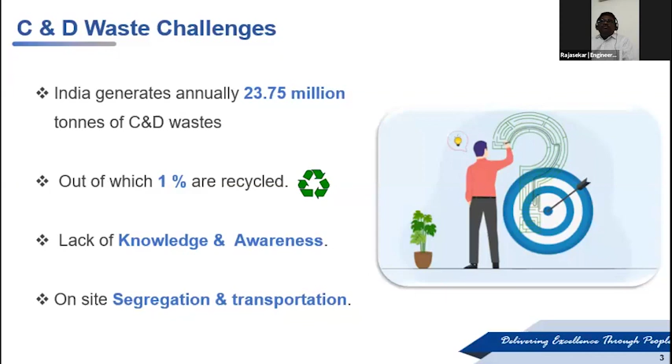Fourth, in our cities like Mumbai, Delhi or Chennai, there is already a lack of space, so we can't segregate it on site as wooden scrap, brick debris, or concrete debris. There is a segregation problem and a transportation problem - local bodies have not identified where we have to deposit or dispose of this scrap. These are the 4 challenges which I thought we have to address first.

These are the facts of construction demolition waste. Regarding this, the Government of India gave clear guidelines in 2016, which came in the form of an act under the Pollution Control Board, under the Ministry of Environment, Forest and Climate Change. This act should be executed as a sub-act of the Municipal Solid Waste Management, to be executed by urban local bodies - meaning corporations, municipalities, panchayats - who have to take the lead on these issues. This is the legal aspect.

Coming to the technical aspect, IS 383, the specification code for aggregates, has given a provision that we can use recycled aggregate in our concrete as a replacement for natural aggregates. Recycled aggregates are called RA, or recycled concrete aggregates. In our government projects too, it has been made mandatory to use at least 10 to 20% in municipal and government contracts. That means we have a legal provision also.

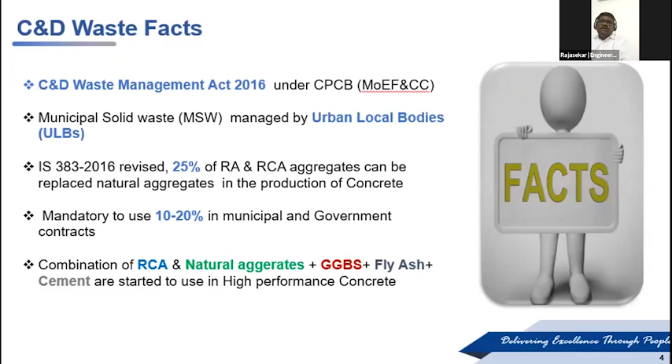Next, we are having technical provisions. Our researchers are working on how to use more than 25%, how we can replace natural aggregate, whether we can increase from 25% to 40% by using GGBS and fly ash along with increased cement content. This can also be used in high performance concrete, meaning concrete of grade more than M30, M40, M50.

This is the annual requirement of raw material for the Indian construction industry, taken from our Union Budget 2022-23. We need around 380 million metric tons of cement, 50 million metric tons of steel, 600 billion numbers of bricks, 400 million cubic meters of natural aggregate, and 40 million cubic meters of timber. That means for cement, steel, bricks, and natural aggregates, we have to once again depend upon natural resources.

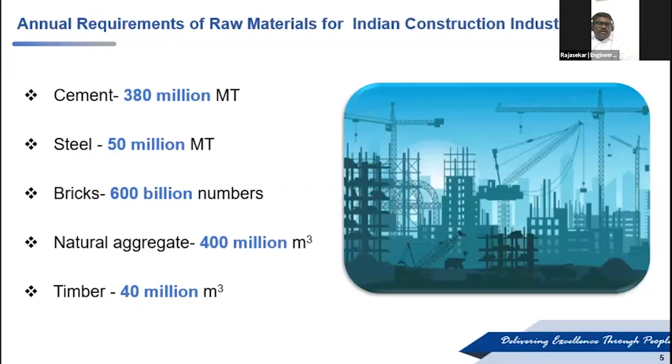On one hand we have to save natural resources, on the other hand we are just wasting this demolition construction waste. Once we start recycling, we can replace this huge quantity to some extent. For example, for natural aggregate around 400 million cubic meters, we depend on rocks and river beds. Once we increase replacement by 30%, we can reduce from 400 million metric tons to 300 million metric tons of natural resources, so we can save the mountains and river beds.

This is the construction waste generation contributed by the top 7 cities of India. Ahmedabad and Kolkata contribute around 700 to 800, Hyderabad and Chennai contribute around 2000 to 2500, Bangalore and Delhi contribute around 3000 to 3700, and Mumbai contributes more. The reason is Mumbai is always a developing city, and we can't stop this development. Mumbai here means Mumbai, Navi Mumbai, and Kalyan - all 3 corporations are included. So Mumbai contributes more compared to other cities. This figure is taken from the State Pollution Control Board of the respective states.

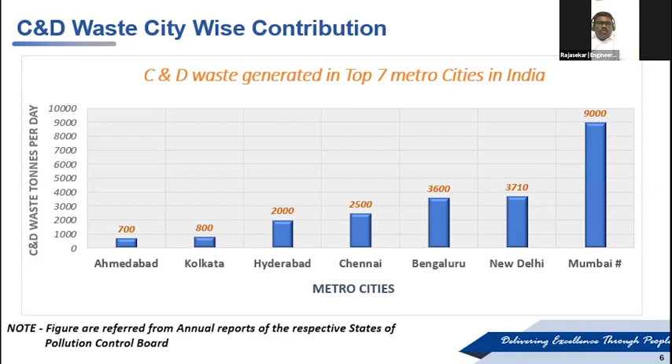This is the adverse effect of construction waste. Usually what we do is deposit this waste, generated at our own site, in unauthorized areas - mainly river beds along the rivers or along roadsides. Because of this, river bodies get affected, and stormwater drains get choked during monsoon time, disturbing traffic also.

Second, this has a great effect on the environment, changing the chemical properties of the top soil, so vegetation also gets affected. Third, groundwater also gets affected due to these unauthorized deposits. Fourth is the diminishing of landfill area, where we want to actually use this landfill area, but we are not able to use it as supposed.

Fourth, when we go for demolition, or construction, or removal of any debris, there is definitely severe air pollution taking place. In this photo we can also see this - I have taken this from the guidelines given by the Government of India. The first page of this photo speaks a lot.

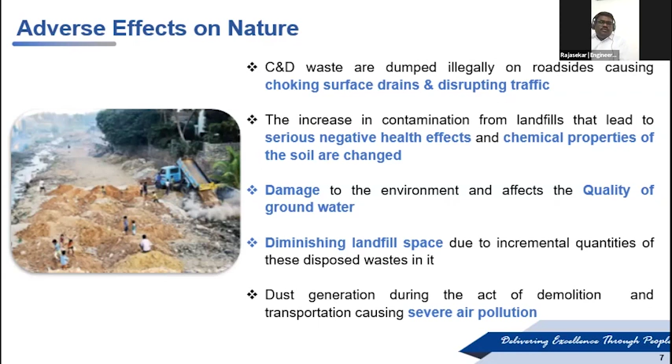In order to control this waste, the 3R system is effective - reduce, reuse, and recycle. First, collection of construction and demolition waste is very important at the site level itself. Site people have to get more awareness on how to segregate brickbats, concrete debris, wooden scraps, steel scraps, and cable scraps. Once they start to segregate at the site level itself, we can complete around 50% of our challenge and go ahead.

Second is transportation. Before collecting, we have to decide where we have to transport this - whether we have to go to a scrap yard, a landfill, or a recycling plant. That has to be finalized.

Once the waste is reached to the recycling plant, the process will get started. The recycling, once it got recycled, is recycled into two manners: either in a silt form or an aggregate form. That application we will see in the next slide.

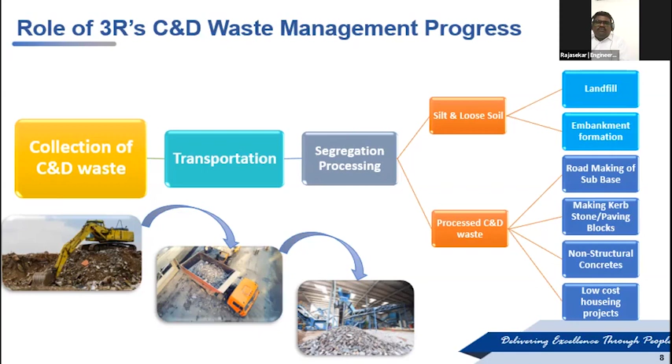As far as C&D waste plants in India, totally we are having 16 C&D waste plants. I came to know through the ministry that around India is going to set up around 100 to 150. The Ministry of Urban Development is going to set up 150 C&D waste management plants across the country, out of which around 20 will come in Maharashtra, and the balance will be distributed equally to all other states.

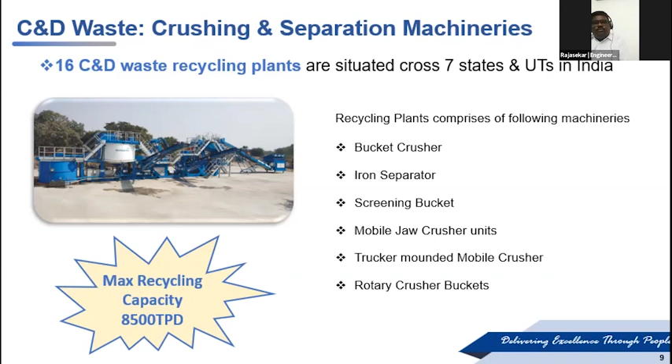These are the machineries which we generally use: the bucket, crusher, iron separator, screening, or mobile crusher unit. This mobile crusher unit can also be used in small sites, wherever demolition, renovation, or expansion of a building is taking place with extensive repair works. These small mobile plants can be installed there itself so that we can reuse the material then and there.

Once it gets recycled, it is called recycled aggregate or recycled concrete aggregate. It may not be equal to natural aggregate, but around 70 to 80%, it can meet the technical parameters. As per IS 383, there is a separate provision given for recycled aggregate.

Recycled aggregate means the aggregate which has been recycled from bricks, masonry, or WBM. Concrete recycled aggregates are the aggregates which have been obtained from the demolition of RCC structures, pile heads, the leftover of RMC plants, or the demolition of old roads. When we are recycling those particular structures, they are called recycled concrete aggregates.

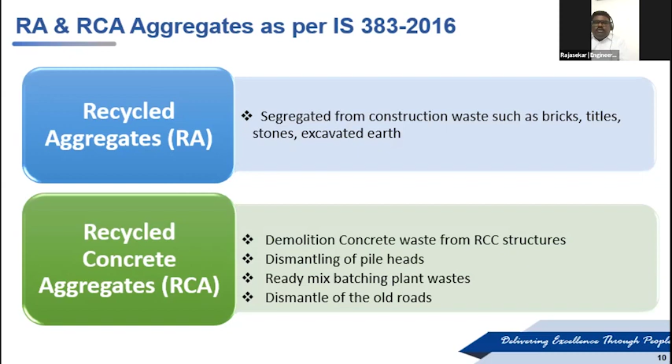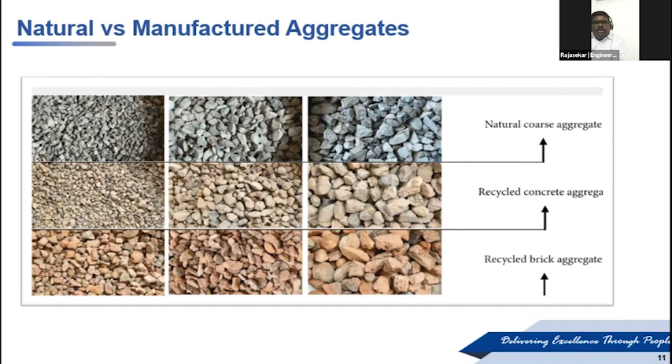These concrete recycled aggregates can be used up to M30 grade concrete as per the current provisions. We can replace around 30 to 40% of the natural aggregates, meaning in non-structural members of housing sectors.

Also in WMM and WBM of roads. In roadworks we can extensively use it, no issue, apart from bridges - we can use it in ordinary roadwork. In drainage, gutters, walls, or curbstones we can use it. CPWD has also started giving good provisions allowing its use. And for pedestrian paths, walkways and such, we can use it.

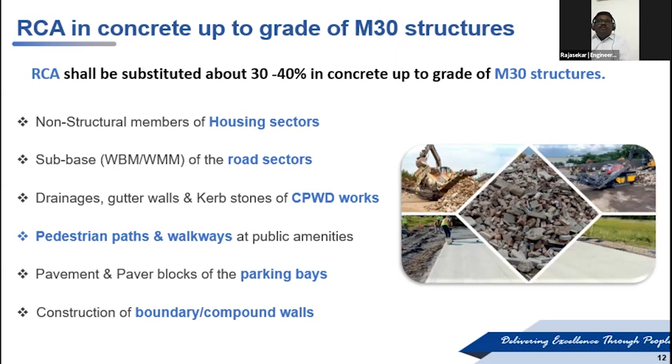Also for pavements, paver blocks, parking bays, and construction of boundary walls. Boundary walls are basically non-structural members that just demark boundaries, so we can extensively use it there.

Where we can use 100% means wherever filling is going to take place, or for PCC - plain cement concrete below the foundation, dry lean concrete - we can use it 100%. Before, we saw replacement of 30 to 40% or 25 to 30%; here we can replace around 100% itself.

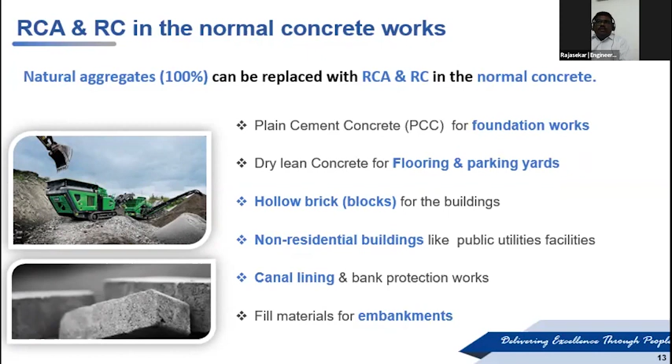For non-residential buildings like public amenities or park areas, we can use it, or for canal lining we can use it extensively. For irrigation works, for lining purposes, we can use it without any doubt. And for filling of embankment works - in embankment works or bridges where the road approach is there, we can also use it.

These are the utilities of recycled concrete and recycled aggregate. Coming to the conclusion and discussion, right now we need a robust method of collecting construction waste management - that is, we are having the rules, we are having a system.

That system has to be performed. Once it gets performed, we'll be able to see a visible output. We need a robust method so that we can handle this C&D waste.

Then installation of a recycling plant. Each and every person involved in construction should know where the debris should go, where it should reach, and how it gets recycled, and how we can replace it. We should know the recycling plant location, and that location should be reachable.

The third point is the government and professional bodies should encourage and develop awareness, so that once we have awareness, we will start using less natural aggregate and use already-used aggregates instead.

Then there is LEED and GRIHA, where we get ratings for buildings. There they have to give more weightage, more credit points. Once a project has utilized around 20 to 30% recycled content, it should be highlighted everywhere, so other builders or construction engineers may also use it, so they can say with pride, I used this old content aggregate and I've been part of saving nature.

Fifth is a geoinformatics system. This is a satellite-based monitoring system. Our ministry is working on that. The basic purpose is to identify how much construction waste is being scattered across India. We aren't able to do this - collection of data itself is a Herculean task for us.

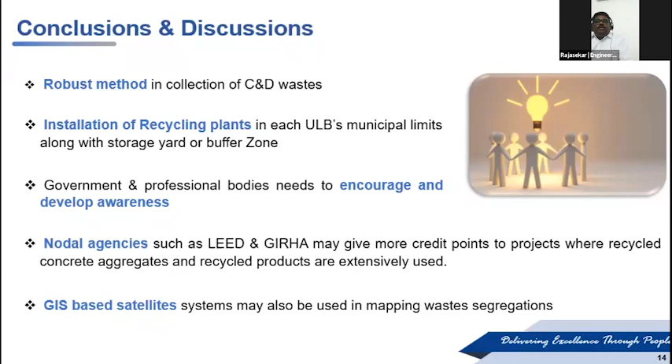Once we get geo-based information, we can identify where material has been placed or deposited, including unauthorized deposits, how we can collect it, and we can also see the quality of the construction waste, whether we can utilize it or not. The quality also we'll be able to find out. This is a new system which in another couple of years we'll be able to get.

Finally, for recycled aggregate and recycled concrete aggregate, we need further research on the chemical and physical properties - how to handle it, how we can replace it, how we can do better polishing or get a better byproduct. For that we need mechanical support and theoretical support as well.

The next point is the 3R system, which I already mentioned - recycle, reduce and reuse. Everybody from the construction person to the client, from the contractor to the labor, everybody should know how to find wealth out of waste. This wealth out of waste is the main concept of C&D waste. Everybody should run an awareness program on this.

Then the final point is collection of data, where we are getting this data - collection is not done properly. Even urban bodies, corporations or municipal corporations are not able to produce correct figures. Why? Because nobody wants to declare how much quantity of debris they're going to generate. Everybody gives an approximate quantity, but most of them are just hiding the data.

Once we have exact data, we can find out how much construction waste has been collected, how much we have recycled, how much has been kept at the yard, and further alternative sources can also be found.

Final point is everybody is moving towards net zero. Every company has committed to reduce their carbon footprint and save nature. Our L&T has also been working on that. We have also set a target of net zero by 2035, and we are working towards that.

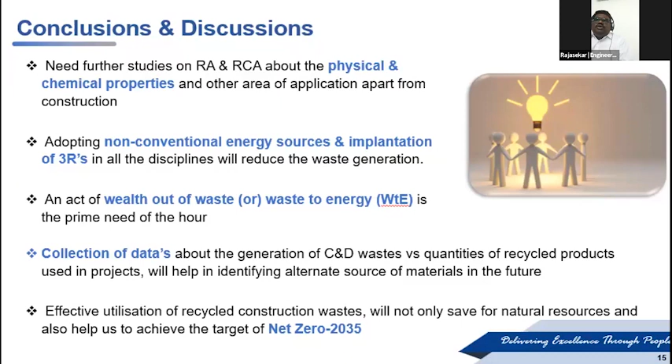We need cooperation from everybody, every corner of the world, every corner of the construction world, to work on this particular topic so we can achieve effective utilization of construction and demolition waste in our future projects. This topic is not only for today - in another 20 or 40 years, we are going to face a huge problem with natural resources. For that, we have to step up today itself to find an effective solution. Thank you.